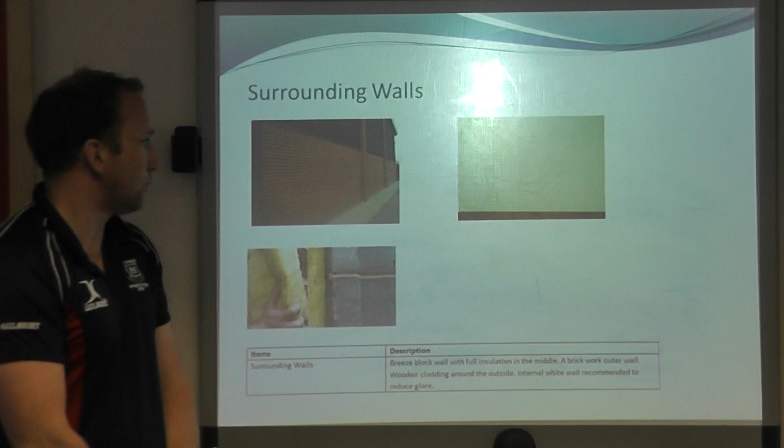Looking at the specific features of the hall to start with, it's got a groundwood sports hall flooring blocks, 174mm by 57 by 10mm, laid on a 30mm cement sand fixing on top of a hollow core flooring. Surrounding walls is a brick outer wall, insulated with fiberglass with a breeze block inner wall which is white. White is a recommendation of colour from Sport England because it is anti-glare for the activities going on in the hall.

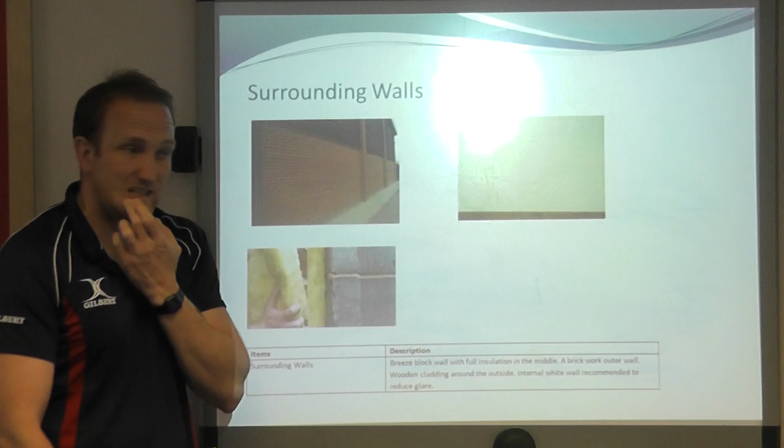Roofing, it's got a pitch roof with horizontally laid panels, steel outer and liner faces rigidly bonded onto a polyurethane foam core fixed on the steel beams which form the structure. Rebound boards all around the outside of the hall. These are made out of pine, 1.2 metres in height and 3 centimetres in depth.

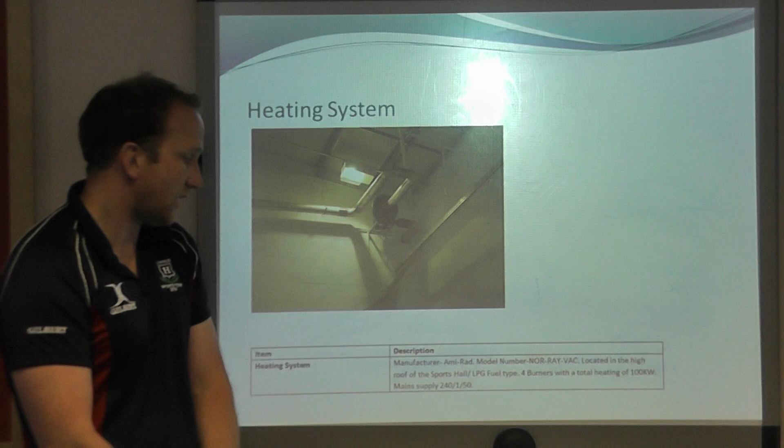Heating system is Ambirad model number NOR-RAYVAC, located in the high pitch of the roof. It has 4 burners with a total heating of 100 kilowatts, main supply of 240 over 1/50. Lighting, 20 lights in rows of 4, there's 5 rows in total. Each lighting contains 400 watt sodium bulb. The lux levels in the hall measure 400 and this is in line with the Class 3 recommendation.

Storeroom doors, there's 3 sets of double doors and storerooms measuring 2 metres by 90 centimetres for each single door. There's flush door handles. The height of these doors means that trampoline beds don't actually fit in the stores, so we don't have a trampoline activity at this facility. Extraction fans, manufactured by Vent Axia. There's 2 fan system located in the ceiling, 300mm fan diameter, main supply 240 over 1/50.

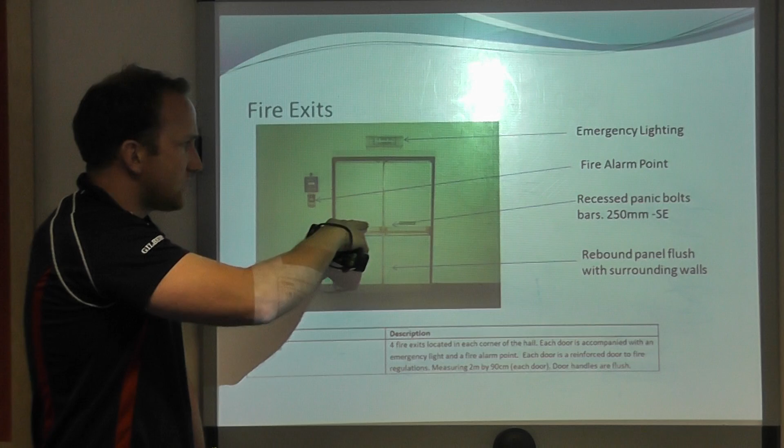Fire exits, you can see the fire exits here with an emergency light, emergency evacuation alarm, 2 recessed panic bolt bars and rebound boards on the bottom. These doors are flush. There's 4 in total in the hall. Power sockets, these are made out of stainless steel, flush against the wall. There is 5 in total in the hall.

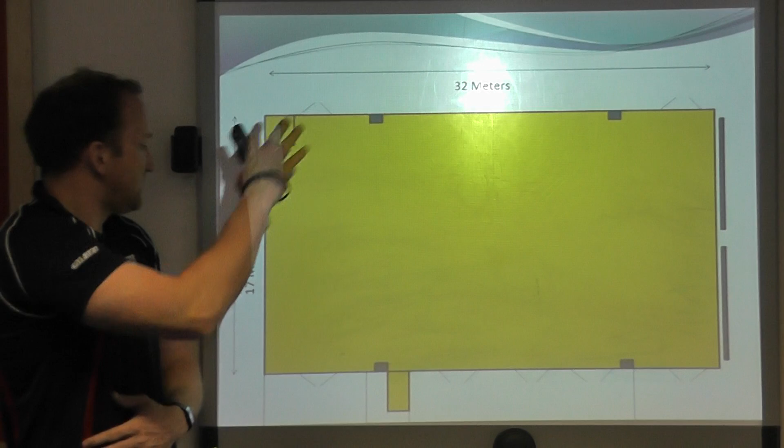The measurements of the hall is a 32 by 17 metre hall. You can see the 4 lanes of cricket nets here, 4 basketball nets with a side screen for cricket. There is a dividing curtain here which comes out and splits the hall into 3 sections.

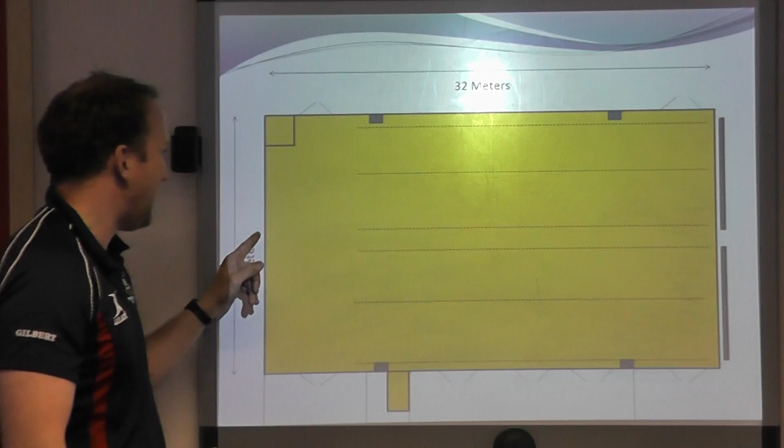It's interesting to see the cricket nets here, the gap between the 2 nets here is only 2 metres, which means it isn't large enough for drop-down basketball nets at each end. The recommendation for Sport England for that is actually a 3.4 metre gap. You can see the 3 store cupboards here and the fire exits. Moving on now to look at the Hawthorns School Sports Centre swimming pool.

The swimming pool is 20 metres in length by 9 metres wide. It's 0.9 metres in the shallow end and 1.9 metres in the deep end, with approximately 45,000 gallons of water in the pool. It's got 4 diving boxes which are fixed, 2 sets of swimming pool covers, lifeguard chairs, quantity 2, 3 pool booms, swimming pool surround seating of 8 benches, and 4 pool steps.

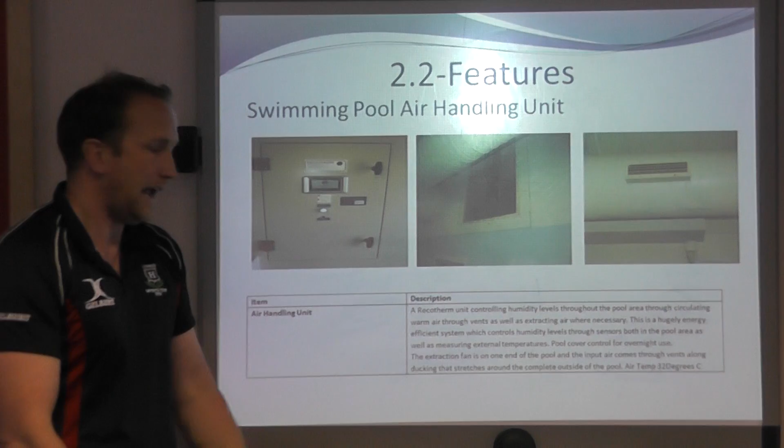The first main feature to look at is the Recotherm air handling unit, which controls the humidity levels of the pool. This is a really energy efficient system. It maintains a constant temperature of 32 degrees. This is 1 degree warmer than the actual pool temperature, and that is recommended by the HSE Managing Swimming Pools recommendation, which is really important.

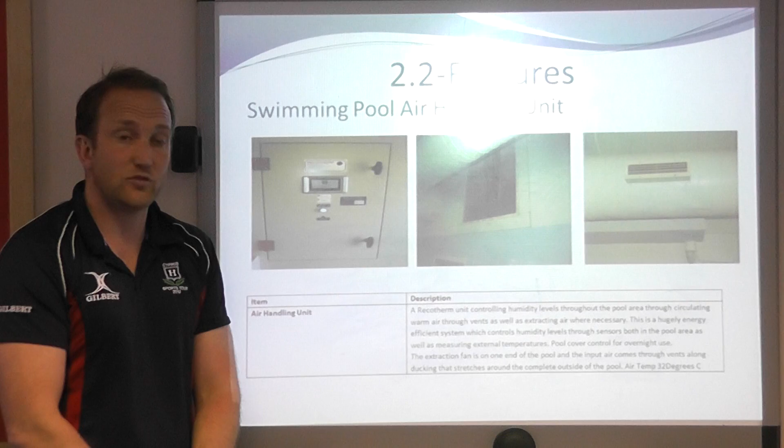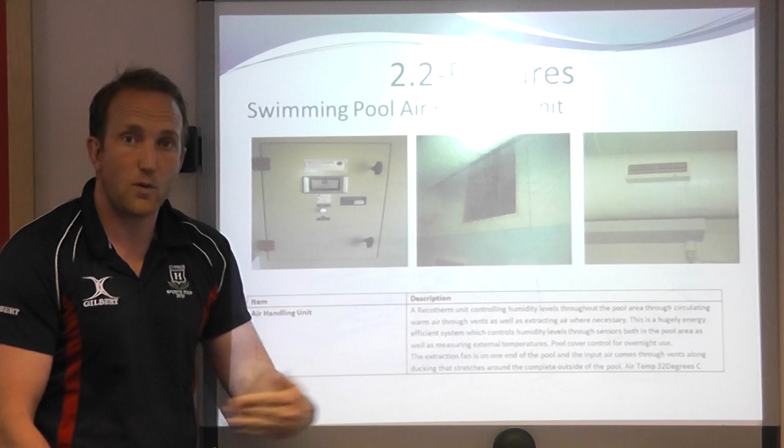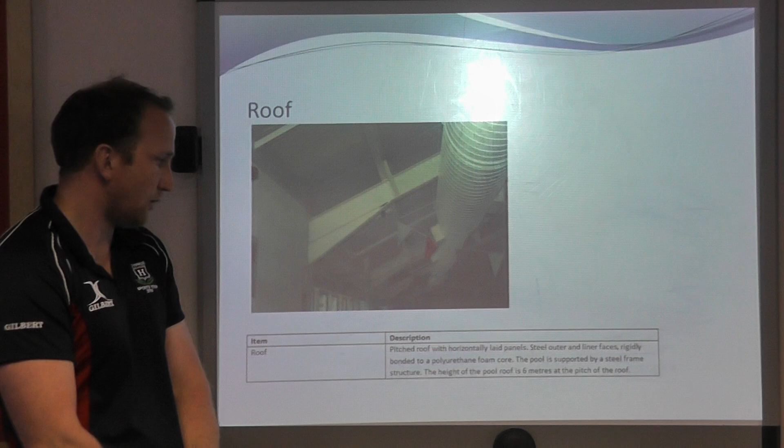It also has sensors inside the building and outside, so it measures daily temperature as well. There's also a switch that is used overnight when the pool covers are on, so this reduces the amount of heating that's going into the pool area. It's got a pitch roof, steel outer and liner faces rigidly bonded on a polyurethane foam core. The pool is supported by steel frames.

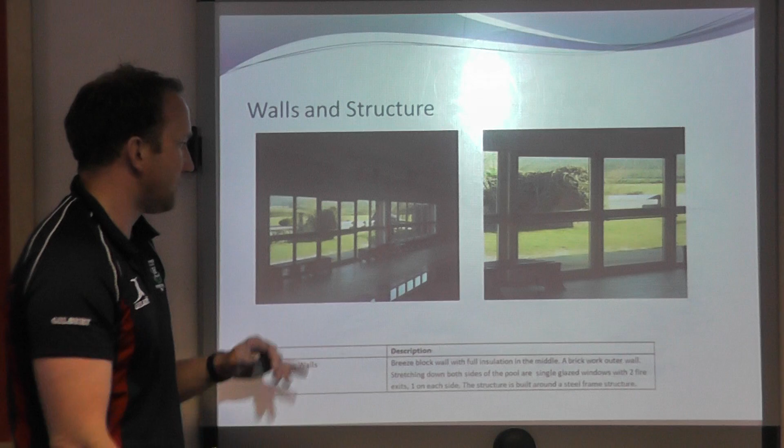Walls and structure: it's again a brick outer, breeze block inner, with windows going down both sides of the pool with 2 fire exits on either side. This is single glazed glassing. The balance tank is in the shallow end, with 2 strengthened plastic covers which are easily lifted out. It's a deck level pool. The filtration system comes in at the gullies on the sides.

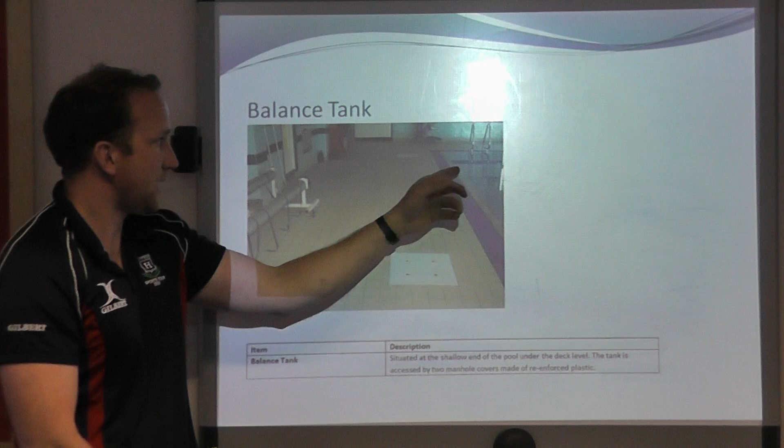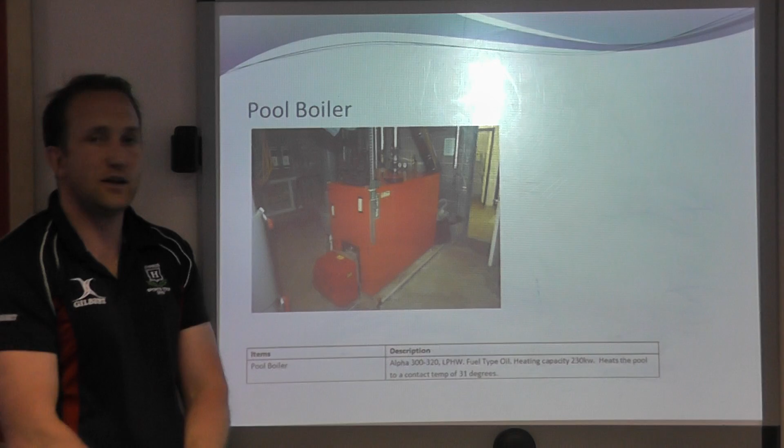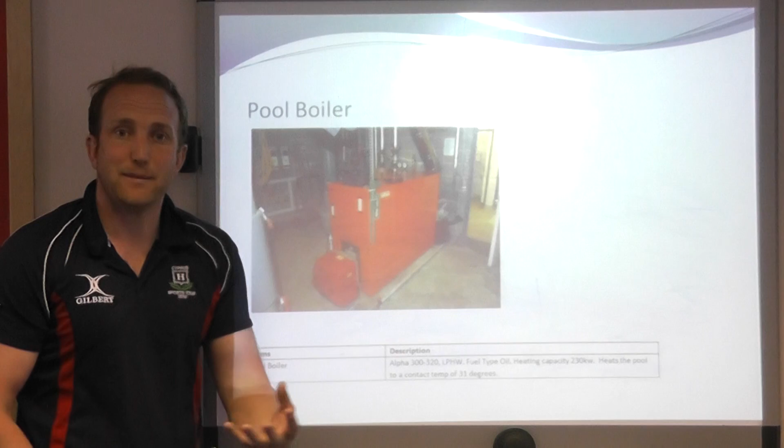The recommendation for a teaching pool is 29 degrees by the HSE Managing Health and Safety in Swimming Pools, but the temperature is slightly warmer than that because of baby swimming lessons we have in the pool. We have very young children, so the pool temperature is kept up slightly.

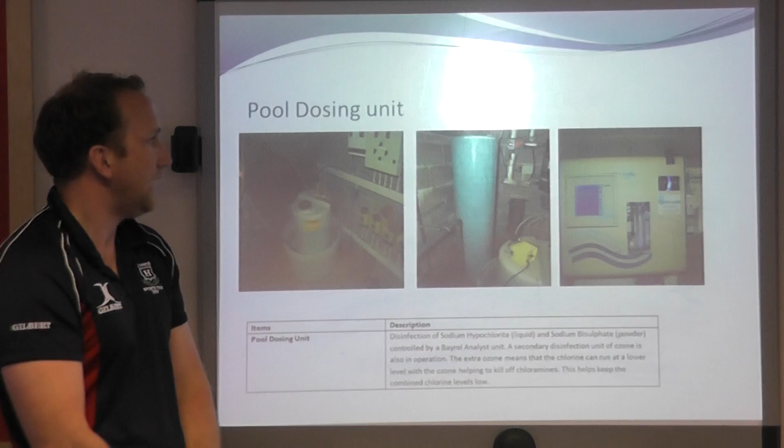Pool dosing units: it's sodium hypochlorite liquid and a sodium bisulfate powder. Also within there is an ozone disinfection unit. This helps to keep the chloramine levels killed off, and also helps to keep the combined chlorine levels low. It's an extra form of dosing and disinfecting, the ozone. The pool filtration unit is a basic sand. It has 2 pumps, only one in operation at each time, which pump the water around in a closed loop system.

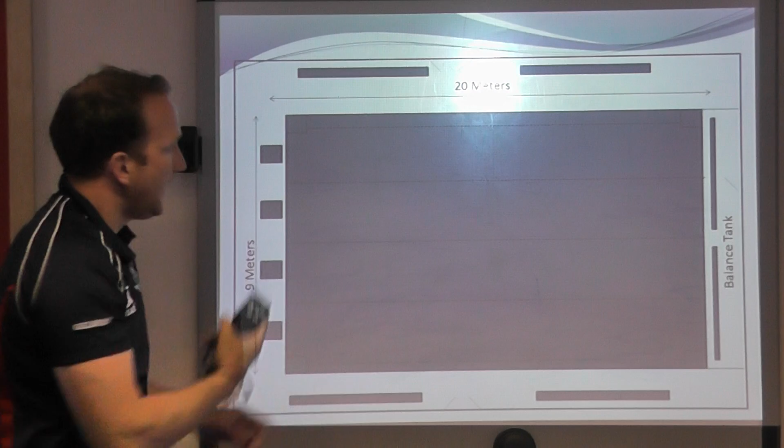Now looking at the spatial design of the pool, again 20 metres by 9 metres, 4 fixed diving blocks, benches on the outside for spectators, 2 fire exits, balance tank in the shallow end with 2 pool covers, with the entrance to the pool. These are portable pool covers and are stored at this end. Now looking at the lane covers, you can see the lane markings here with the 4 entrance steps in the corners of the pool. The yellow lines represent where the pool booms go; the sockets are in the side, which, as mentioned, split the pool up.

Now looking at the Hazelwood School Sports Centre, this is where the comparison now starts. First of all, the Hazelwood Sports Centre was owned by the Hazelwood School. It was opened in 2006. It has 2 main features, the swimming pool, which was first constructed in 1981, and the sports hall, which was opened in 2006. Interestingly enough, the pool was refurbished in 2012.

The Hazelwood School Sports Centre sports hall is the first part of the facility we're going to look at. It's, again, 18 metres by 34, 7.5 metres high. Only slightly smaller than the Sport England recommendation for a multi-purpose sports hall. Again, the length is just 0.5 metres difference. It has badminton courts, football pitch markings, tennis courts and basketball courts.

The tennis courts are in blue. Sport England recommends yellow for tennis courts, and the netball court is in orange. It should be red. Physical equipment: 6 basketball rings, 4 going across the court and 2 end-to-end. Cricket nets, sight screen and hall dividing nets.

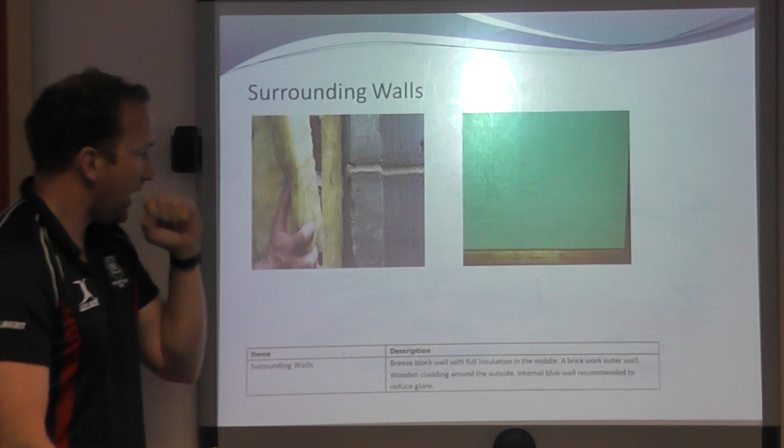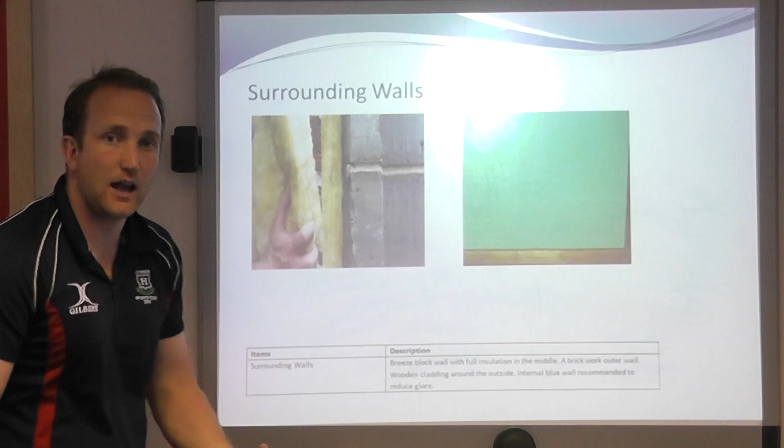Features: groundwood floor, surrounding walls with an insulated middle, fiberglass with a brick outer and breeze block. The colour of this hall is green, another recommended colour which produces anti-glare for playing facilities, recommended by Sport England.

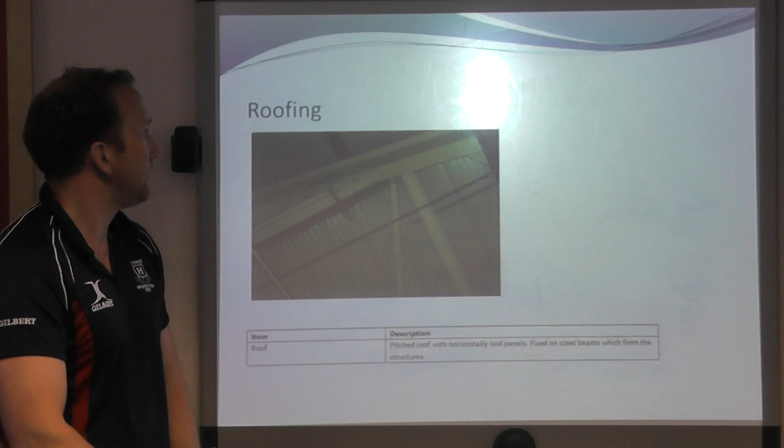Roofing is a pitched roof with horizontal lay panels fixed on steel beams which form the structure. Rebound boards around the outside are 8 centimetres in height, 3 centimetres in depth, made out of pine wood.

Heating system is an Ambirad model NORYC, exactly the same as the Sports Centre, same 100 kilowatt heating and main supply 240 over 1 over 50. The lighting is 16 lights in rows, 4 rows in total.

The lux levels in the hall measure 500, in line with the Class 3 recommendations, 100 lux better than the Hawthorne School Sports Centre.

Store cupboards are 2.5 metres in height, which gives enough height for trampoline beds to fit in, so trampoline is another activity the hall can be used for. These have flush handles on to prevent people catching themselves when playing.

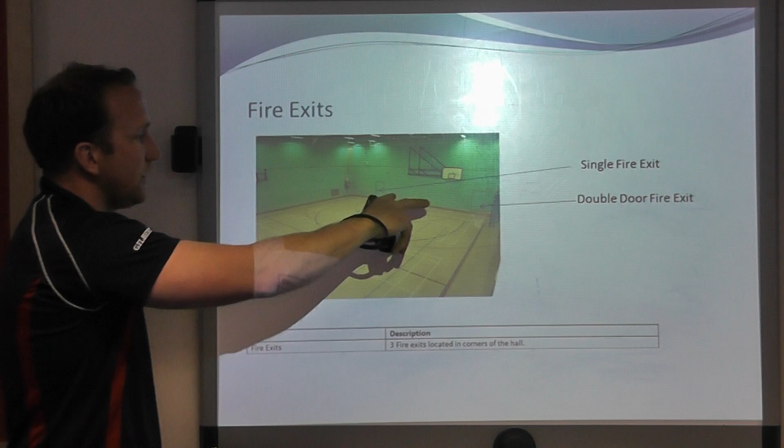Power sockets, again stainless steel covered sockets, 6 in total in the hall. These are flush, preventing any hazards when people are running past.

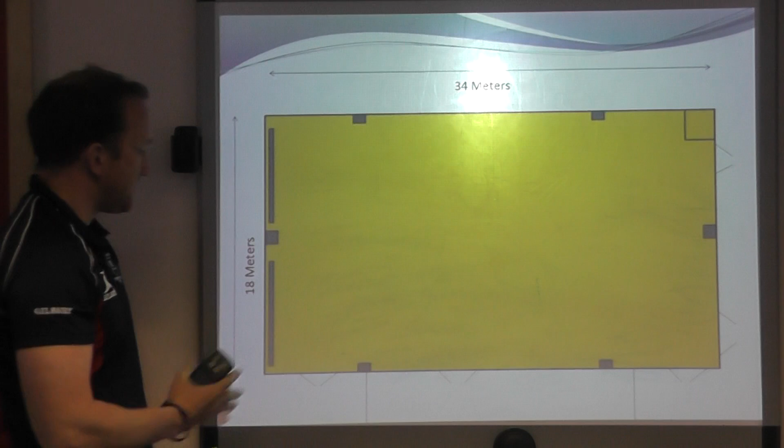Looking at the dimensions of the hall, it's 34 metres by 18 metres. We've got 2 sets of cricket nets here, 4 nets in total, with 4 basketball courts around the outside, and the store cupboards here.

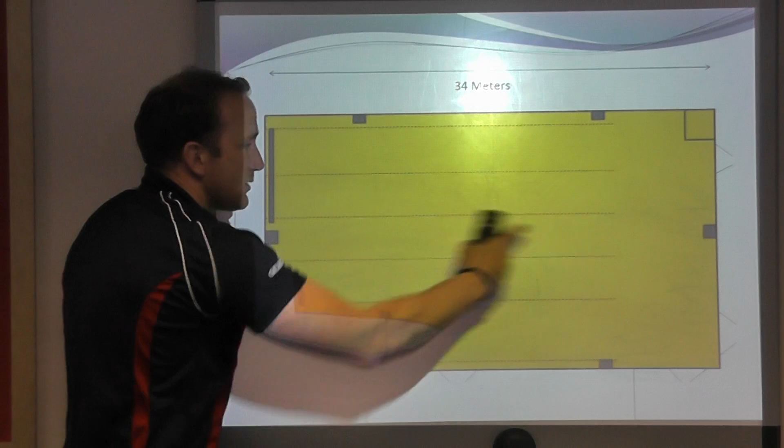Interesting to see, with the cricket nets out, there's a gap of 4 metres between these 2 nets, which means we can have end-to-end basketball. The recommendation from Sport England is 3.4 metres gap between the nets for basketball. This has 4, which means this has extra basketball nets end-to-end.

The hall also has dividing nets which come out here, which split up the hall. There's also the sight screen for the cricket.

Now moving on to looking at the Hazelwood School Sports Centre swimming pool. Diving blocks, 2 in total, these are fixed. Swimming pool covers which are fixed at the shallow end. Pool surround seating, 8, which is 6 benches, and pool steps, 1.

It's 15 metres by 6.5 metres. Shallow end of 0.7 metres, deep end of 1.6 metres, holding approximately 30,000 gallons of water.

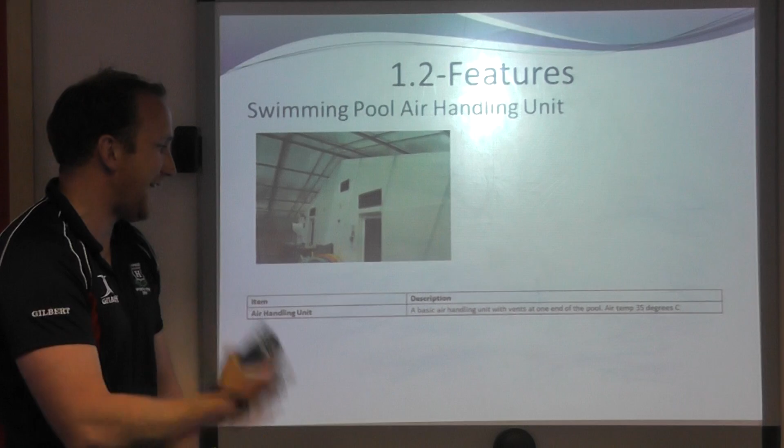The swimming pool features an air handling unit. It's a basic system which comes from the breeze block end of the pool, at the shallow end. Heats the air to 35 degrees C, which is extremely warm. This is a very old system they have here.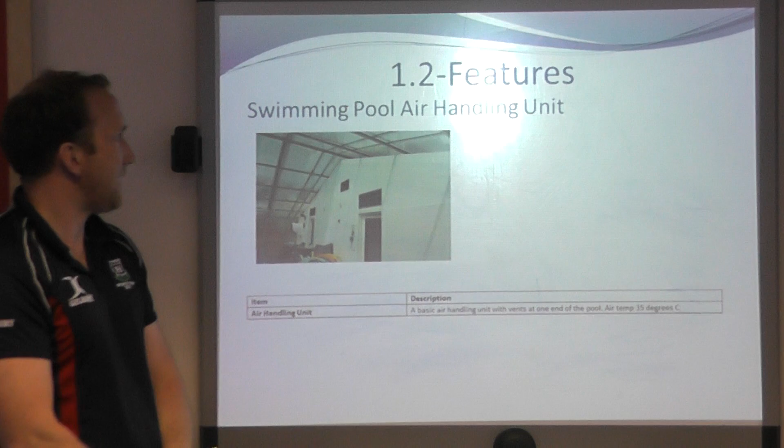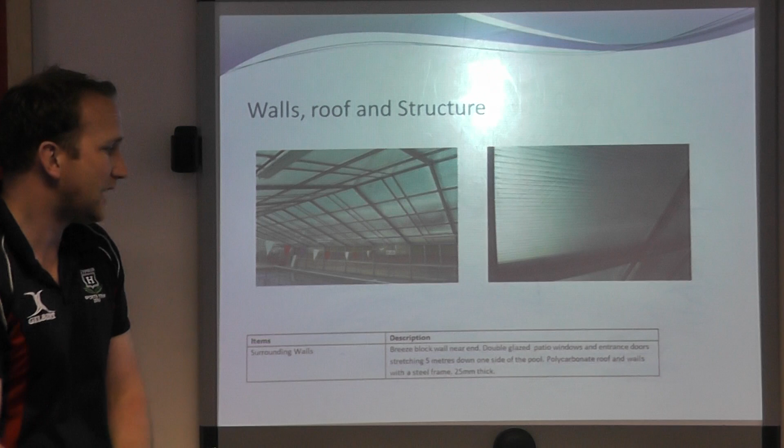The walls, roofs and structure: it's breeze block wall at the near end, double glazed patio windows and entrance doors stretching 5 metres down one side of the pool. It's got a polycarbonate roof and walls with a steel frame, 25mm thick.

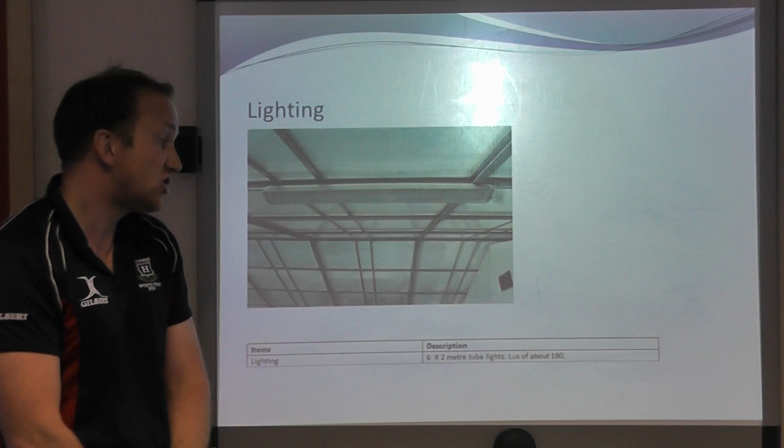The pool decking is a granularised non-stick rubber floor. The lighting is 6 2-metre tube lighting, with a lux of about 180, which is very low. Lighting quality in this pool is not great.

The air temperature is 35 degrees, really for the pool. The air temperature should be 30 degrees, 1 degree warmer than the water.

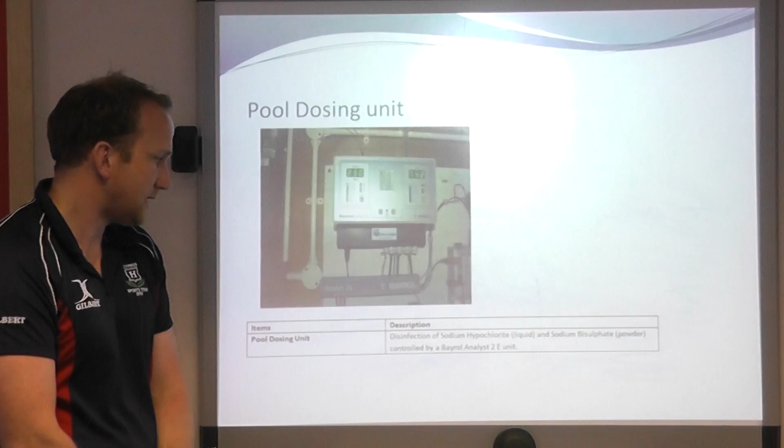The pool dosing unit is a disinfection of sodium hypochlorite and sodium bisulfate. The bisulfate is powder, hypochlorite is liquid, with a Bayrol Analyst measuring the levels and keeping that constant.

The pool filtration system is sand filtration with 1 pump, on a closed loop system.

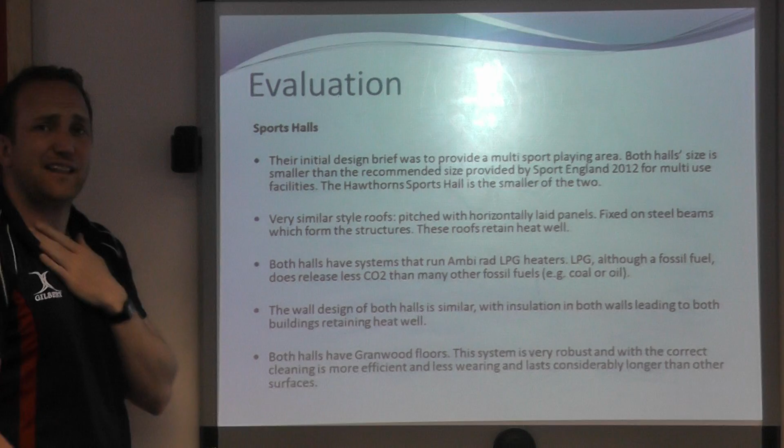Now looking at the evaluation of both halls, starting with the sports halls. Both halls' initial design was to provide a multi sport playing area. Both halls are slightly smaller than the recommendation from Sport England 2012. The Hawthorns Sports Hall is the smaller of the two, and they have very similar style roofs, pitched with horizontally laid panels.

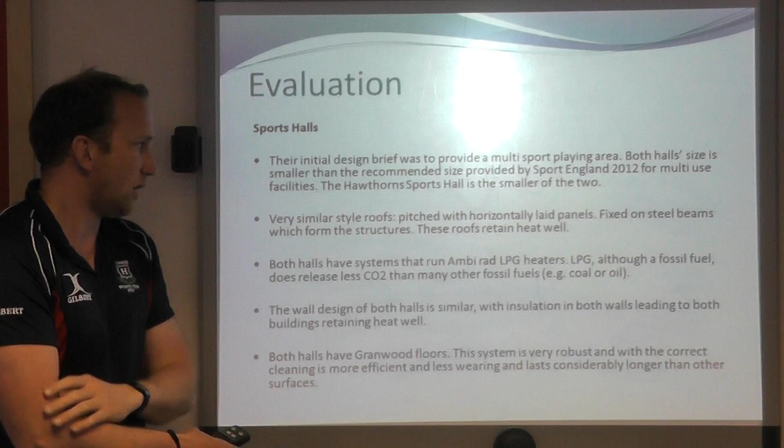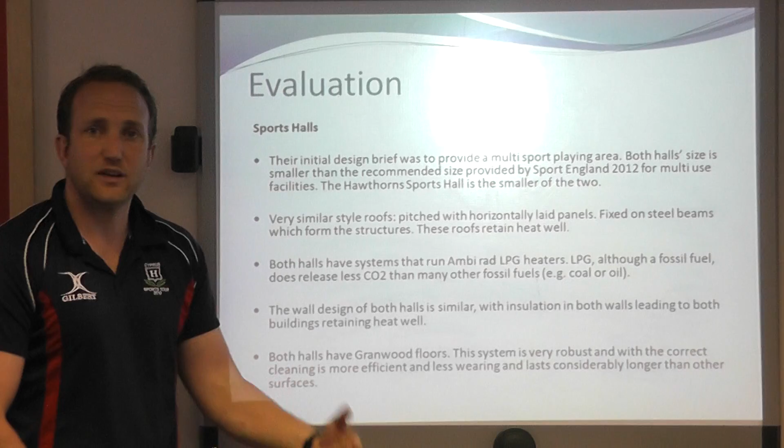Both halls have systems that run ambi-rad heaters, using LPG fuel as a fossil fuel, which is slightly better than any other CO2, coal or oil, which is better for the environment. The wall design of both halls is similar, both insulated with a breeze block inner and a brick outer. Both halls have Granwood floors.

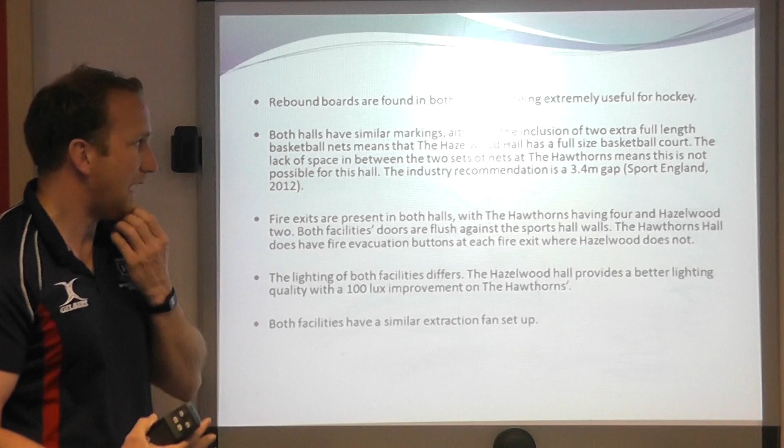Rebound boards in both halls, again these are useful for hockey. Both halls have similar markings, although as we've presented, they don't necessarily meet up with Sport England colour recommendations. The big difference is the Hazelwood Hall having the end-to-end basketball nets because of the 3.4 metre gap that's in between the cricket nets. Fire exits are present in both halls.

The lighting of both facilities differs. Hazelwood Sports has a much better lux level. Both facilities have similar extraction fan setups.

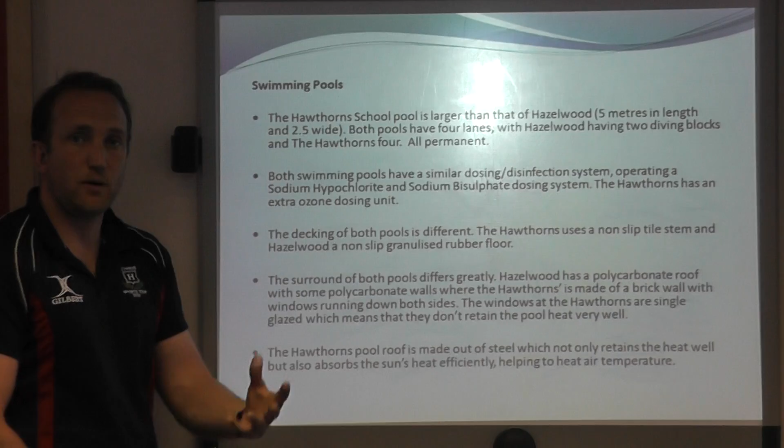Now looking at the swimming pools comparisons, the Hawthorn School pool is larger than that of Hazelwood, larger by 5 metres in length and 2.5 metres in width. Hazelwood has 2 diving blocks that are fixed, Hawthorn having 4. Both swimming pools have similar dose and disinfection units.

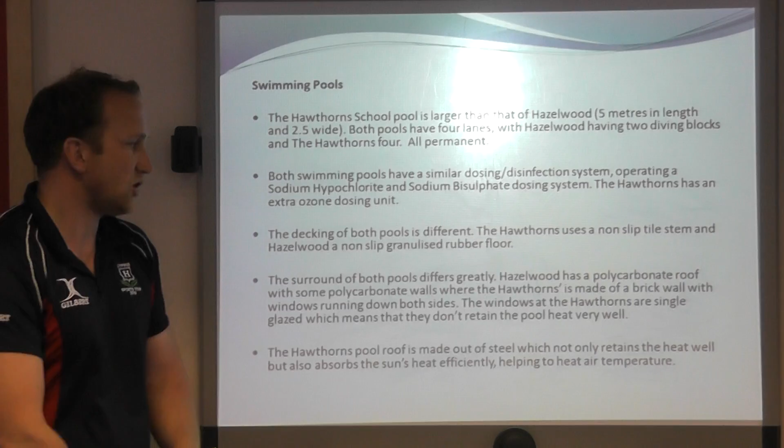The decking of both pools is different. Hawthorn has a non-slip tile, whereas Hazelwood has a non-slip granularised rubber floor. The surround of both pools differs greatly.

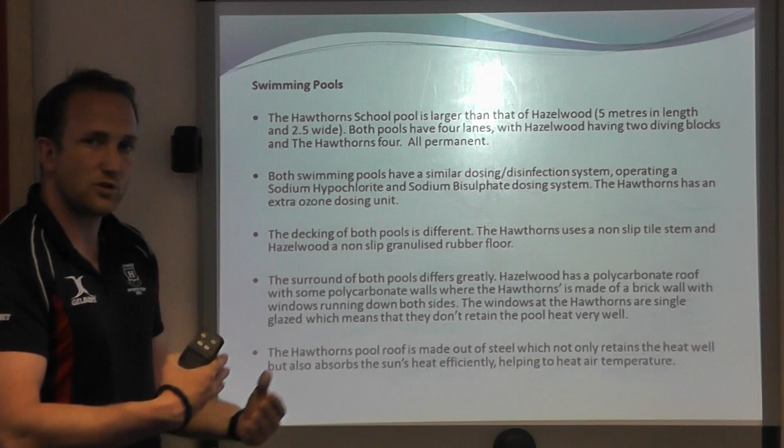There's a polycarbonate roof at the Hazelwood pool, whereas the Hawthorns has a roof which is steel. Hazelwood also has this polycarbonate covering around the outside, which at the Hawthorns is a brick and window, the only difference being that the windows at the Hawthorns aren't double glazed.

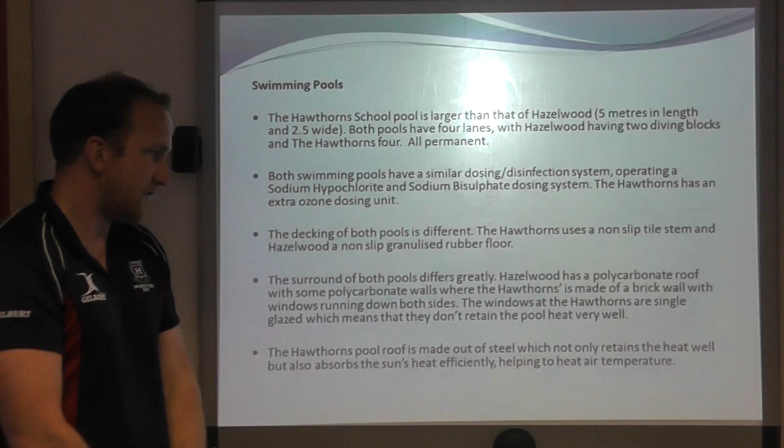The Hawthorns pool roof is made out of steel, which retains the heat, certainly a lot better than the polycarbonate roof of Hazelwood.

Now moving on to just recommendations, and I picked the Hawthorn School to make some recommendations for improvements. The first thing we would do is look to employ or promote somebody of the staff to be the energy champion. They could then monitor monthly usage and set targets for the sports centre to reduce its energy consumption, create an energy policy, and increase maintenance of facilities.

At the moment, electrical goods, the heaters, electrical products are having an annual service. We'd look to improve this service, make them run more efficiently, and have the services every quarter.

Looking to turning off lights signs around the sports centre, having those signs and lights to encourage people to turn the lights off. Have light sensors in the sports hall, so if they're not being used and the lights are left on, they will turn off themselves. Using energy saving light bulbs in the store would be another way to save on energy.

At the Hawthorns, we'd look to reduce the pool temperature from 31 to 30 degrees C. This would reduce the amount of heating needed for the pool, the consumption of the oil in the boiler by 1 degree. Customers would not notice a huge difference, but there would be a saving in the fuel used to heat the pool, and it would be closer to the recommendations from the HSE Managing Health and Safety.

And then finally, looking to increase the showering of swimmers, do an awareness campaign, letting our customers know the importance of showering and how we could cut back on using the chemicals that clean the pool for the extra dirt coming in from people that aren't showering properly.